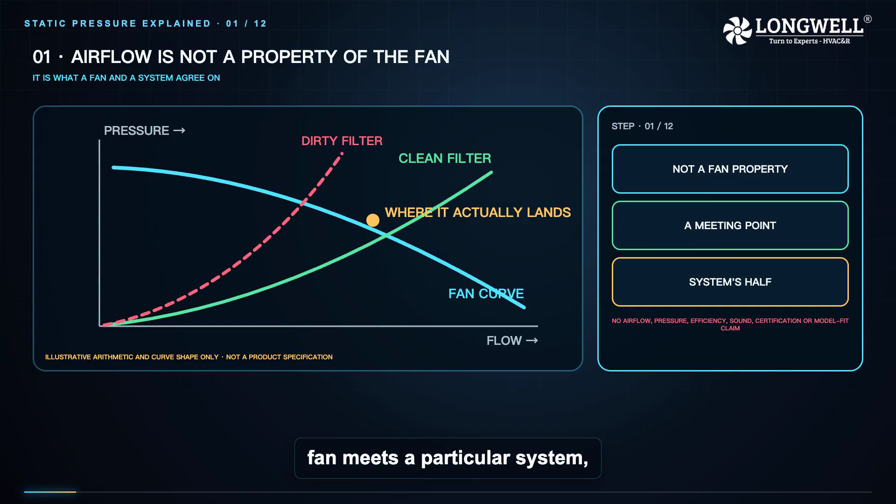Static pressure is the single most misunderstood number in fan selection, and the confusion costs real money. People quote a fan's airflow as if it were a property of the fan. It is not. Airflow is what happens when a particular fan meets a particular system, and static pressure is how you describe the system's half of that bargain.

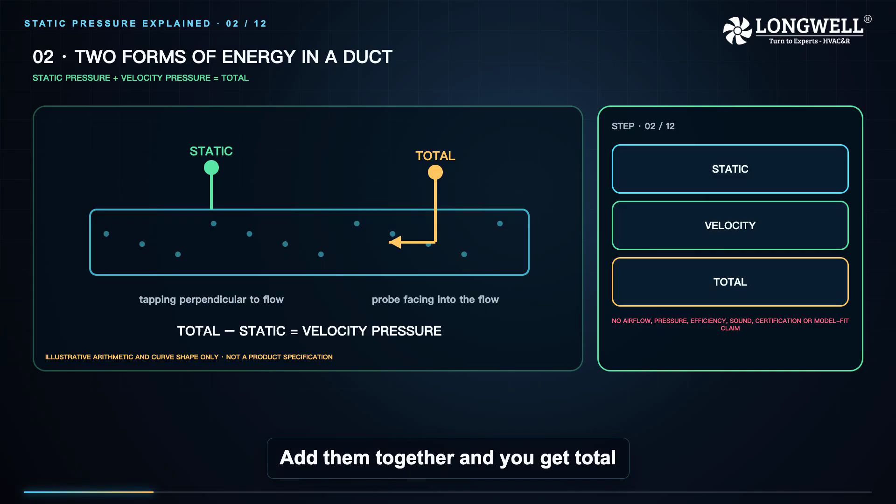Start with what pressure actually is. Air in a duct carries energy in two forms. Some of it is pressure, pushing outward on the duct walls in every direction, and that is static pressure. Some of it is motion, the energy of air actually traveling down the duct, and that is velocity pressure. Add them together and you get total pressure, which is what the fan really produces.

The distinction matters because they trade against each other. Speed the air up and static pressure falls; slow it down in a widening duct and static pressure rises again. Nothing was created or destroyed, the energy just changed form. This is why a measurement taken in a narrow section reads differently from one taken in a wide section of the same duct carrying the same air.

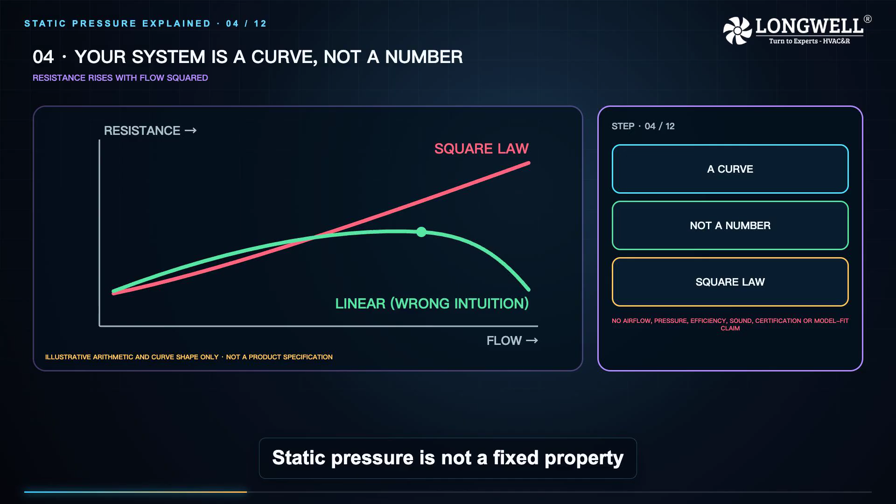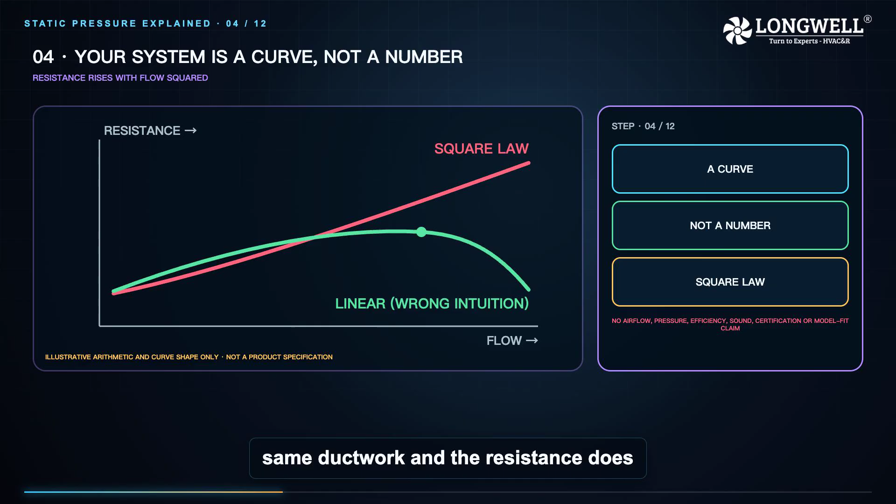Now the part that catches people out. Static pressure is not a fixed property of your system either. It rises roughly with the square of flow, so it is a curve, not a number. Push twice as much air through the same ductwork and the resistance does not double, it roughly quadruples. That single relationship explains most of the surprises in fan selection.

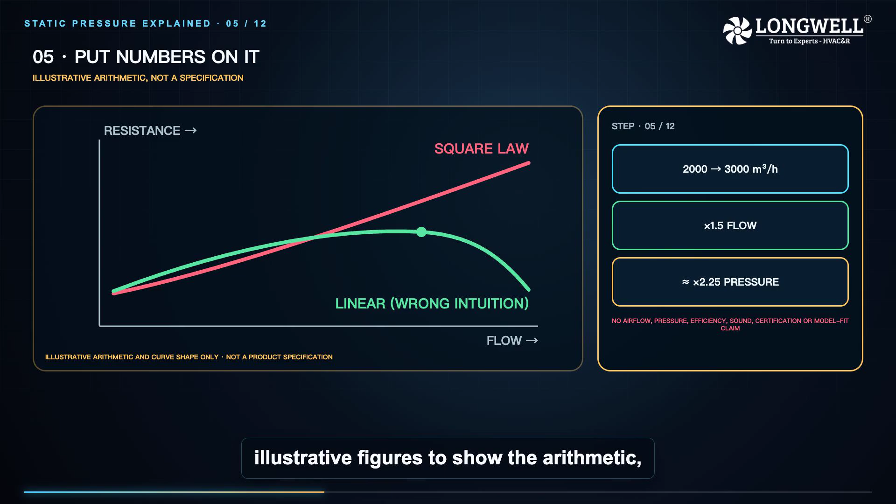Let us put numbers on that, and let me be explicit that these are illustrative figures to show the arithmetic, not a specification for any product. Say your system needs 250 pascals at 2000 cubic meters per hour. Ask for 3000 instead, a 50% increase in flow, and the resistance becomes roughly 250 times 1.5 squared, which is about 560 pascals. Not 50% more.

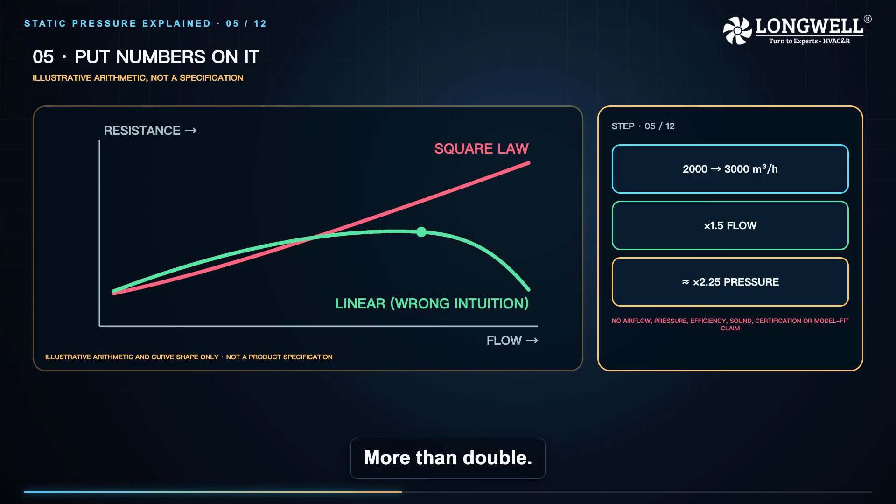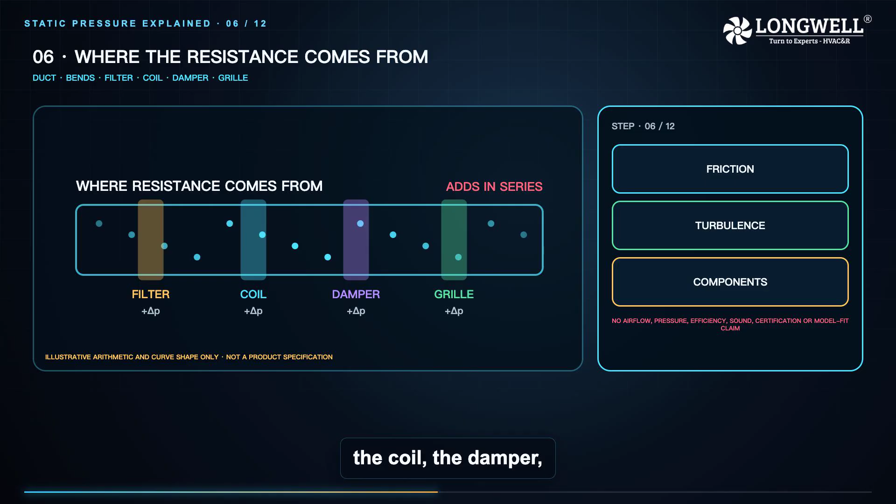More than double. Where does that resistance come from? Every component in the path contributes: the ductwork itself through friction along its length, every bend and transition through turbulence, the filter, the coil, the damper, the grille at the end. They add up in series, and the total is what your fan has to overcome.

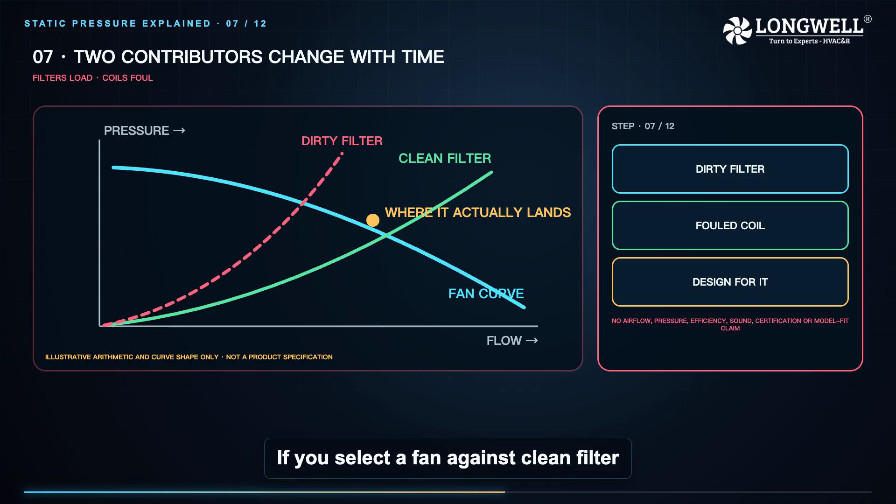Two of those contributors change with time, and this is where designs go wrong. A filter's resistance rises steadily as it loads with dust, often to several times its clean value before anyone changes it. A coil fouls. If you select a fan against clean filter conditions, you have designed a system that meets its duty on the day it is commissioned and never again.

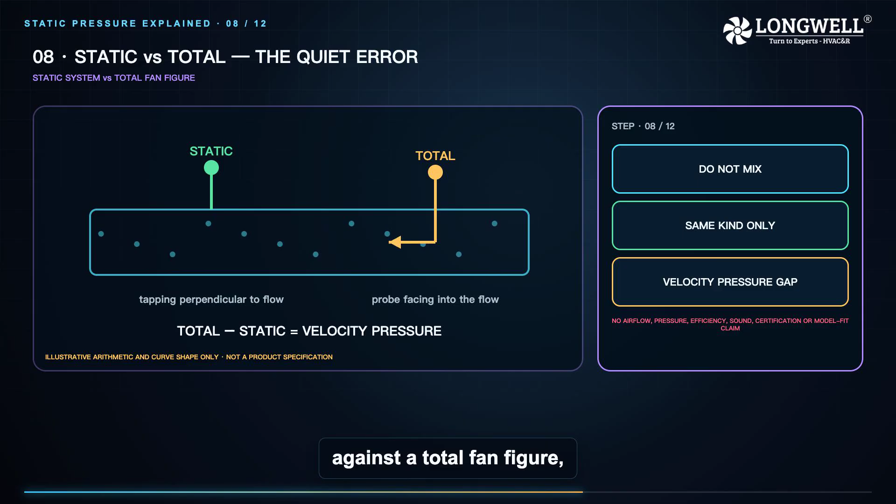There is a second trap in how the number gets communicated. A fan's published pressure is normally total pressure or static pressure at a stated test condition, and a system's calculated resistance is normally quoted as static. If you compare a static system figure against a total fan figure, you will overestimate what the fan can do by exactly the velocity pressure at the outlet. On a high-velocity system, that error is not small.

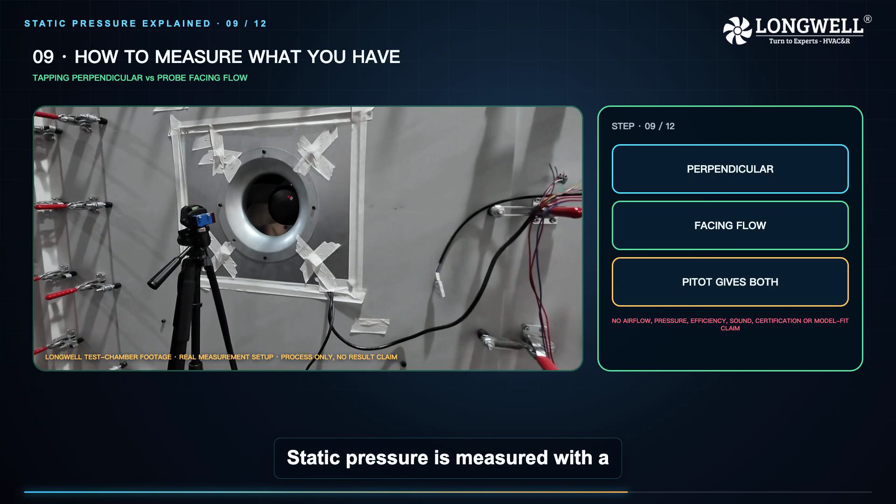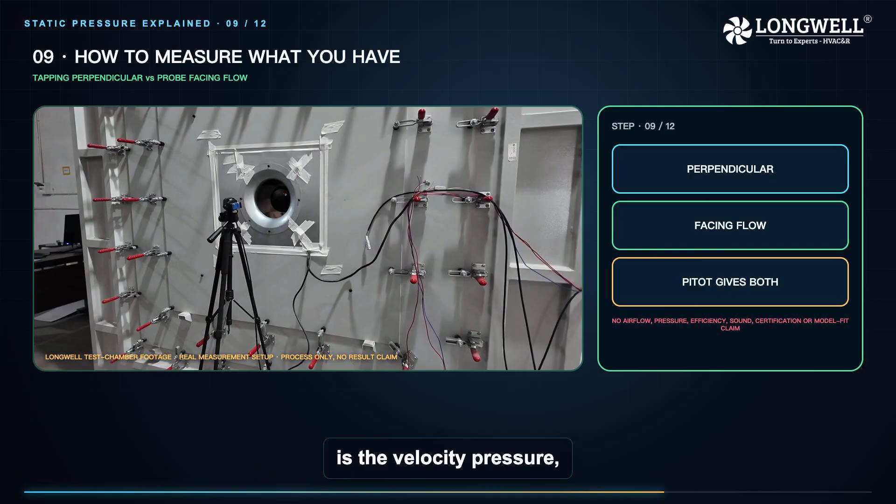So how do you measure what you actually have? Static pressure is measured with a tapping perpendicular to the flow, so the moving air does not push into the sensing hole. Total pressure needs a probe facing into the flow. The difference between the two readings is the velocity pressure, which is why a pitot tube gives you both from one instrument.

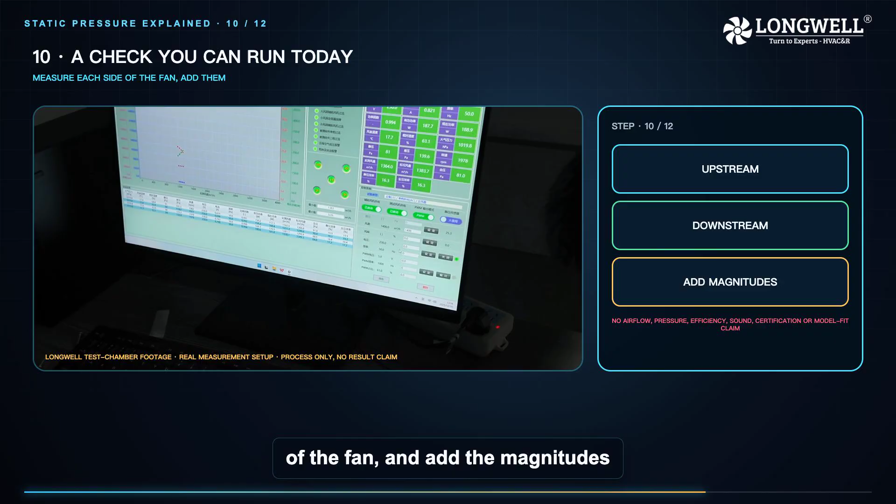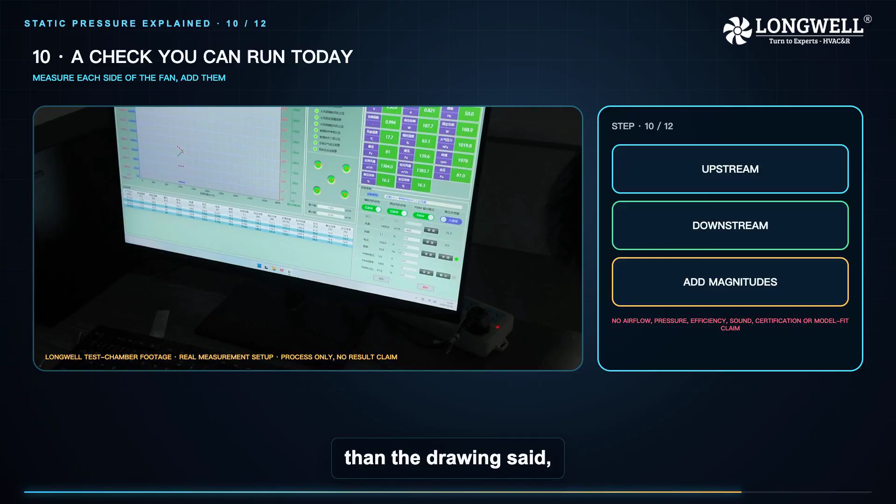Here is a practical check you can do on an existing system. Measure static pressure immediately upstream and immediately downstream of the fan, and add the magnitudes together. That total is roughly what the fan is working against right now. If it is well above the design figure, something in the path is more restrictive than the drawing said, and no amount of fan speed is a substitute for finding it.

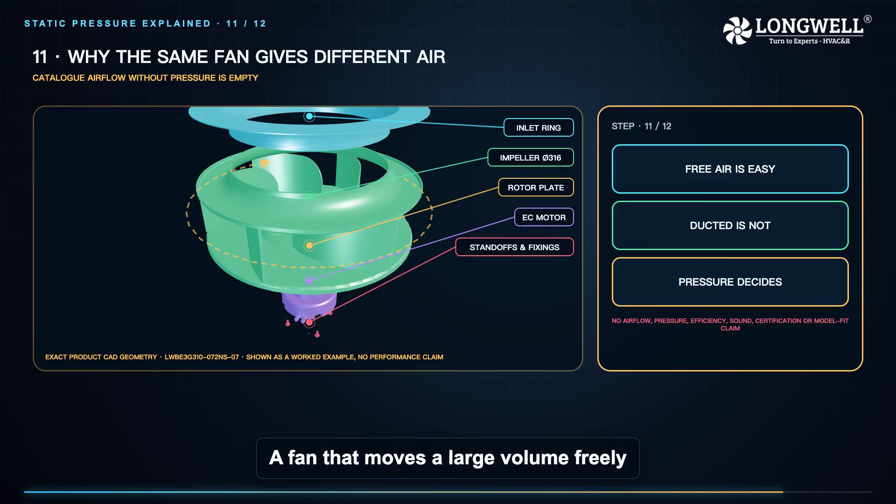This is also why the same fan gives different airflow in different installations, and why a catalog airflow figure with no pressure attached is meaningless. A fan that moves a large volume freely at zero pressure may move very little through a real duct system, and a fan built for pressure will look unimpressive on an open bench.

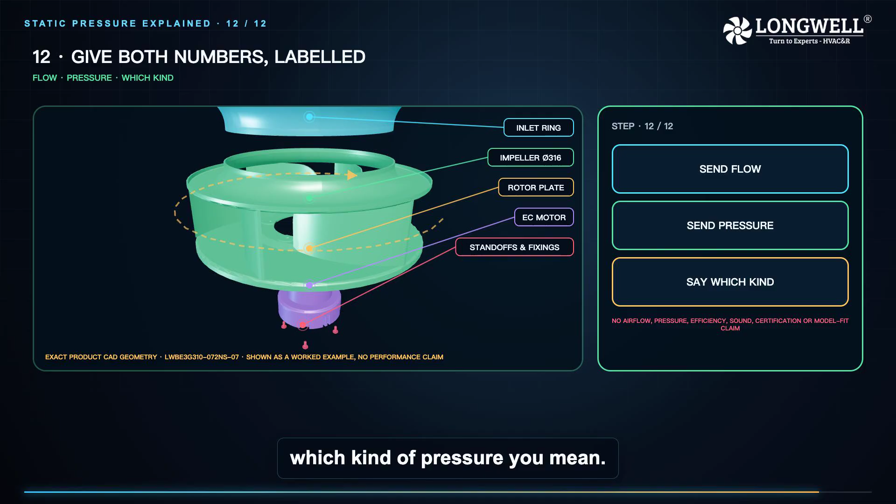So when you specify, give both numbers together and say which kind of pressure you mean: the airflow you need, the total pressure your system imposes at the dirty filter condition, and whether that figure is static or total. Two numbers, clearly labeled, turn a guess into a selection.